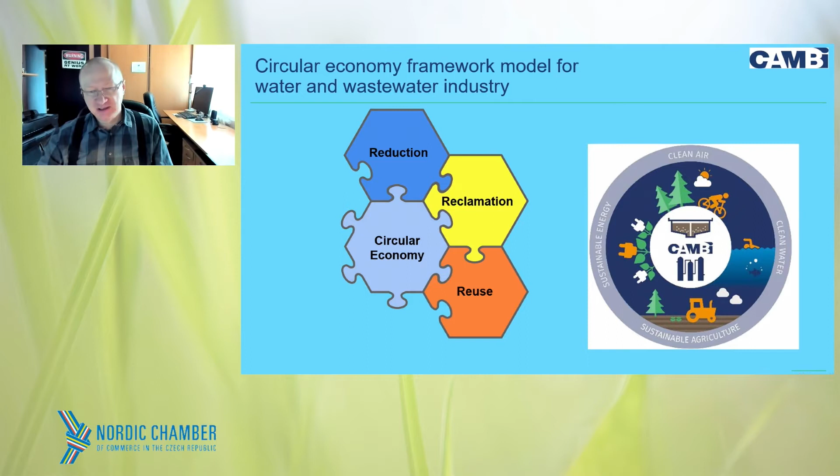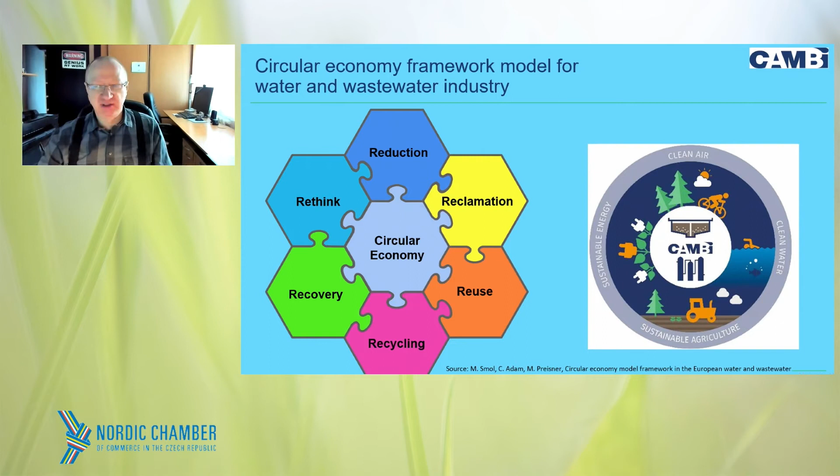The next is the reclamation, which is the application of effective technologies for the removal of pollutants from water and wastewater. The following is the reuse. We can reuse the wastewater as an alternative source of water supply for the non-potable usage, and it was also mentioned before. We have also the next R, which is recycling, the recovery of water from wastewater for potable use. It's also mentioned before. Recovery of resources, such as nutrients and energy from water-based waste. And finally, the last but not least, it's also very important, rethinking how to use the resources to create a sustainable economy, which is free of waste and emissions. This is the source, if someone would be interested in the details of this framework model.

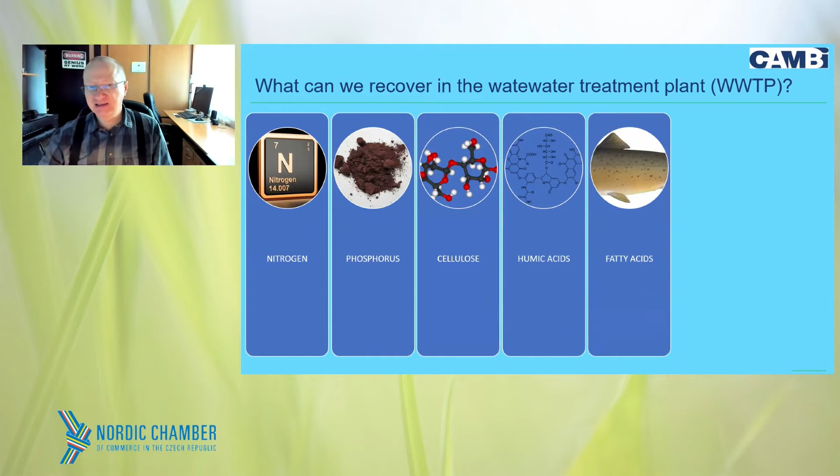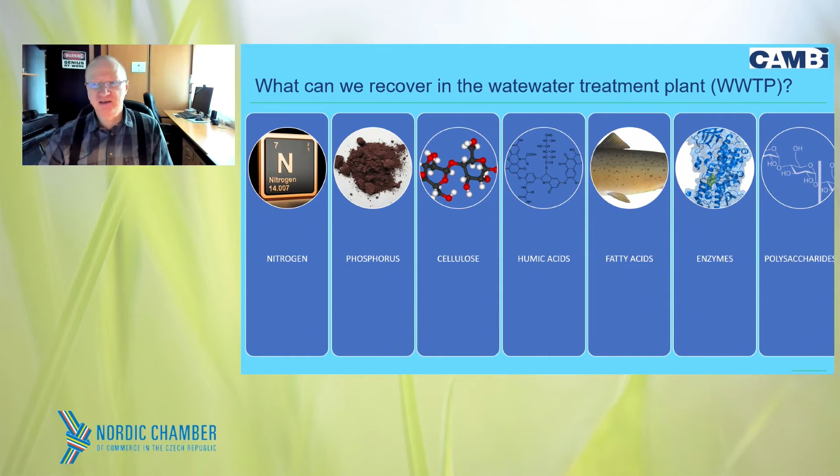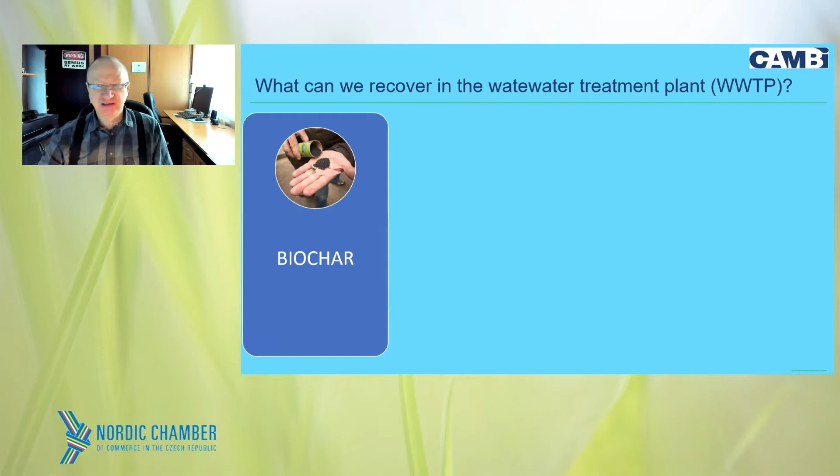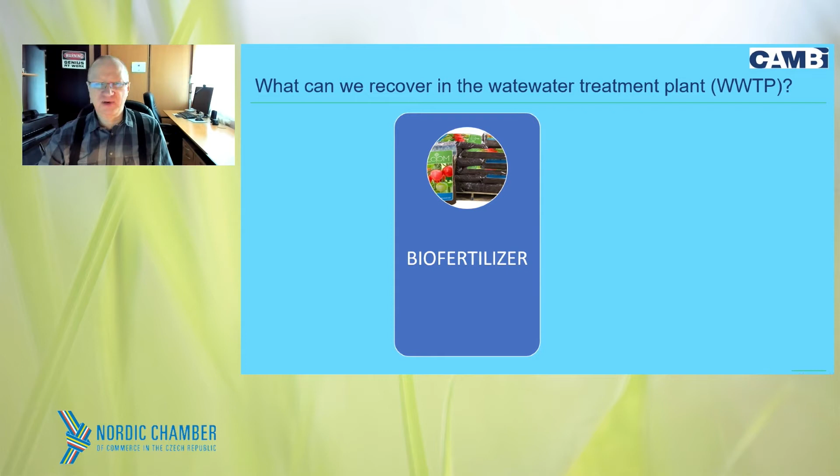There are several things we may recover from our wastewater. Let's just mention a few of them. The most common are nitrogen and phosphorus, but also others, like cellulose, humic acids, fatty acids, enzymes, or polysaccharides. Some technologies already exist and are quite commonly used, and some still require improvement because they are in the prototype state. The biochar recovery technology exists also, but it is at the present time used in rather small plants. What I would like to focus on are the biofertilizer, electricity, and heat.

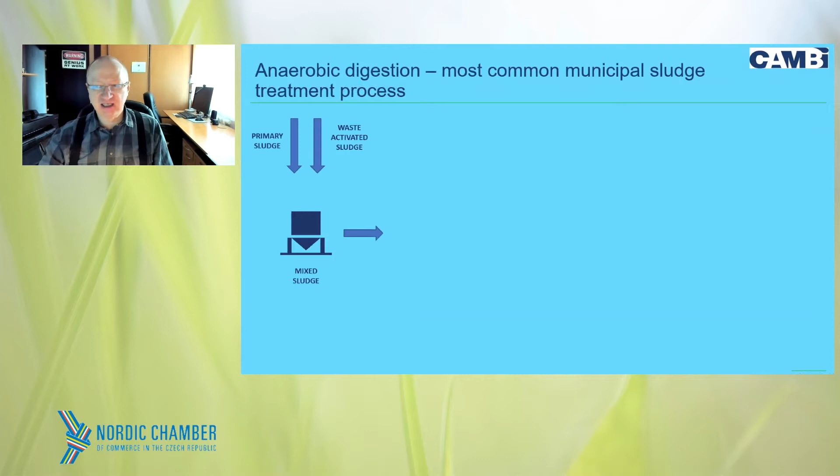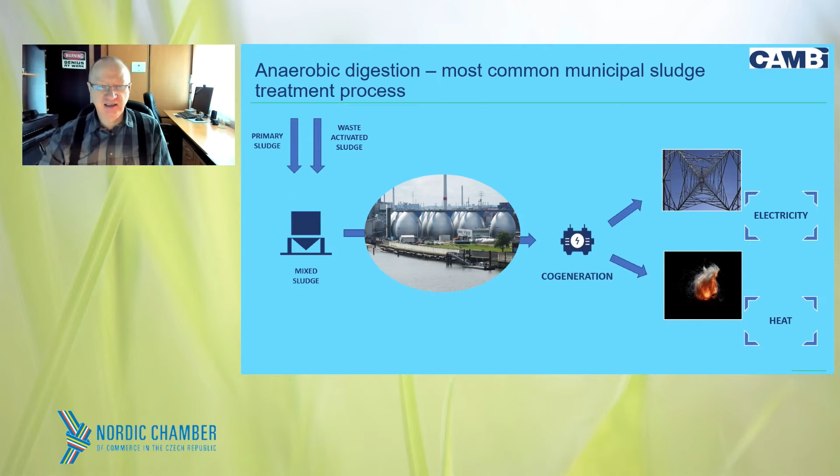The anaerobic digestion of municipal sludge is widely known and commonly used, so I will not go into details. Both primary and waste-activated sludge are mixed and sent to the digestion chamber. Then biogas is produced, which is burned in cogeneration and produces the electricity and heat. As we see, the conventional anaerobic digestion process gives us three precious products: electricity, heat, and final sludge. This is the place where the final sludge is produced.

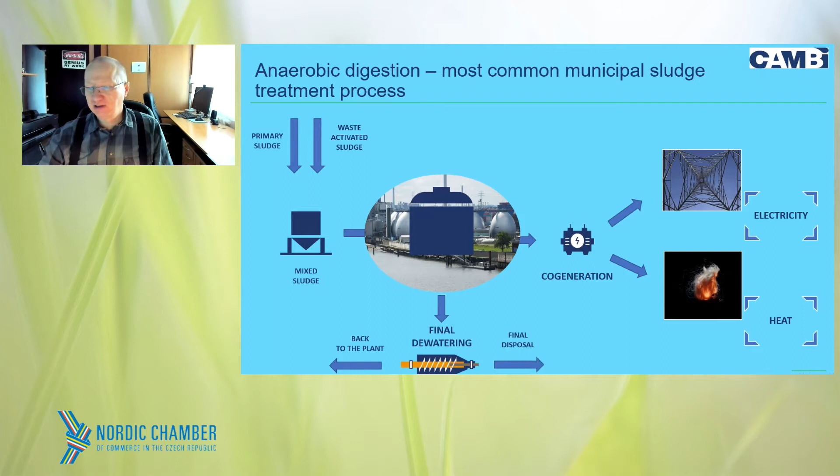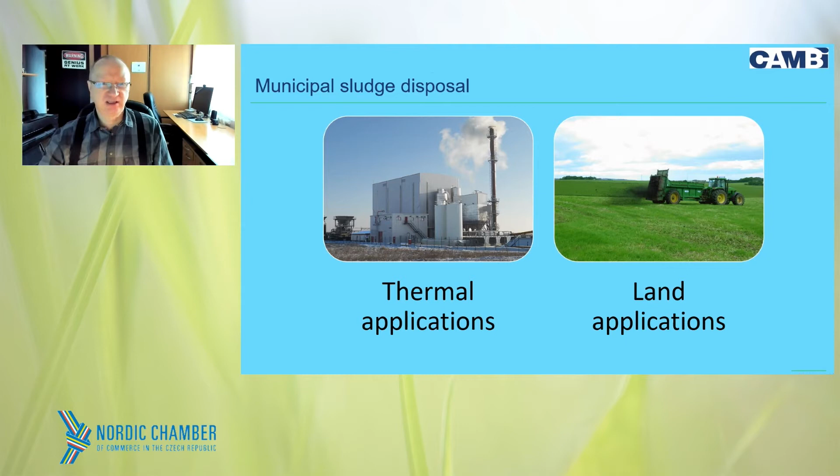In general, there are two groups of final sludge disposal. The first one is the thermal applications, and the second is the land application. Today, I will not discuss the thermal applications because they only partially match the concept of the circular economy. I will rather focus on land applications. The sludge directive regulates conditions of using the sludge in agriculture. Among the other things, it describes conditions of the application, reporting obligations, and, important from the processing point of view, the limits related to heavy metals.

However, of course, we shall remember that heavy metal content in the biosolids is the consequence of their content in the raw sludge and the quality of the wastewater treatment. The anaerobic digestion does not change metal content, but it increases its concentration due to the reduction of the sludge amount. Then we have the fertilizing regulation. Among the other things, it also covers the use of the biosolids. I mentioned just the most important regulations, but there are, of course, several which we have to comply with. And what can we do to comply with all those regulations?

We may try to enhance the anaerobic digestion process, which has basically 4 steps which occur one by one. The process is probably perfectly known to you, so maybe it is not necessary to repeat it. However, there is some purpose which I would like to mention. The steps of the anaerobic digestion are hydrolysis, acidogenesis, and finally methanogenesis. And like all chemical processes which consist of individual sub-processes, the kinetics of the slowest sub-process determines the kinetics of the whole reaction. And in this case, the slowest sub-process is the hydrolysis. So the conclusion is that if we can increase the rate of hydrolysis, then we can increase the whole process of the methane fermentation. And for this purpose, we developed the process which is called thermal hydrolysis.

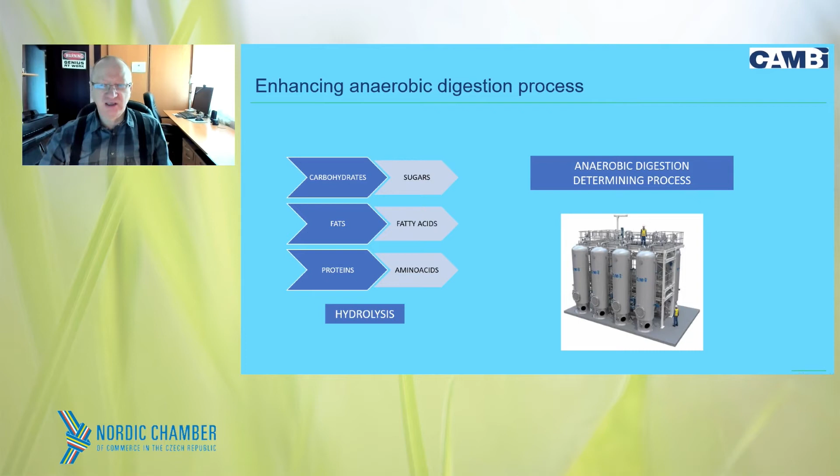The combination of thermal hydrolysis and conventional anaerobic digestion gave the process which we called advanced anaerobic digestion. This name was created by the United Kingdom utility company, which holds several water and wastewater treatment plants. The company name is Thames Water.

In this case, the sludge is pre-dewatered, and then it goes to the thermal hydrolysis process. The centrate from the pre-dewatering is sent back to the plant, and the hydrolyzed sludge after dilution is sent to the digestion. As previously, the biogas produced in the digestion process is burned in the cogeneration unit, but it also could be upgraded to biomethane and loaded to the gas network.

The rest of the process is the same. Electricity and heat are produced. The heat is used to produce steam necessary for the thermohydrolysis process. The sludge after digestion is dewatered. The centrate is again sent back to the plant, and as a product, we receive the biosolids.

Let me now show you how the thermohydrolysis process works. The sludge, it could be a mixed sludge, but it could be separate, for example only the surplus, is pumped to one of the four reactors after preheating with the recovered steam.

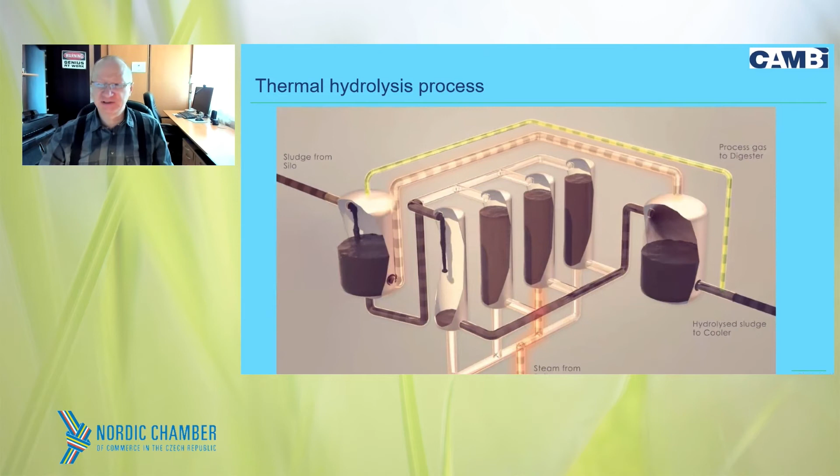Then the sludge is cooked with the steam at a temperature of about 165 degrees Celsius and under about 6 bars pressure. After that, there is a rapid discharge to the tank, which is called the flash tank, and then there is rapid depressurization from 6 bars to atmospheric pressure. So there occurs the process called the steam explosion, which additionally disrupts bigger particles.

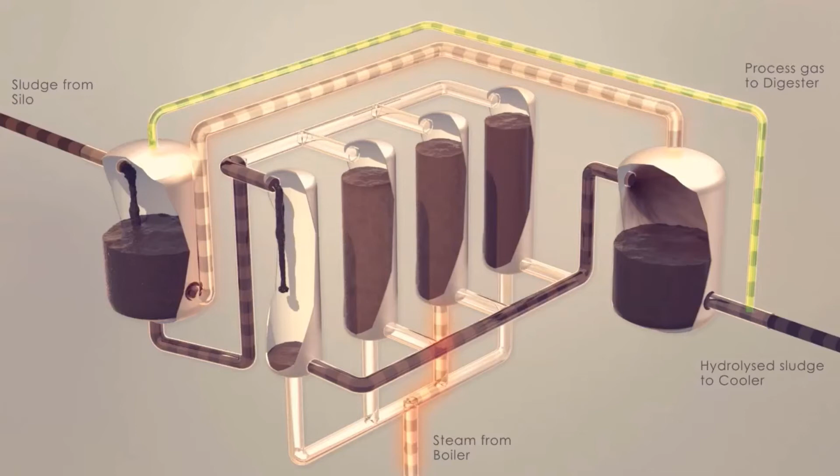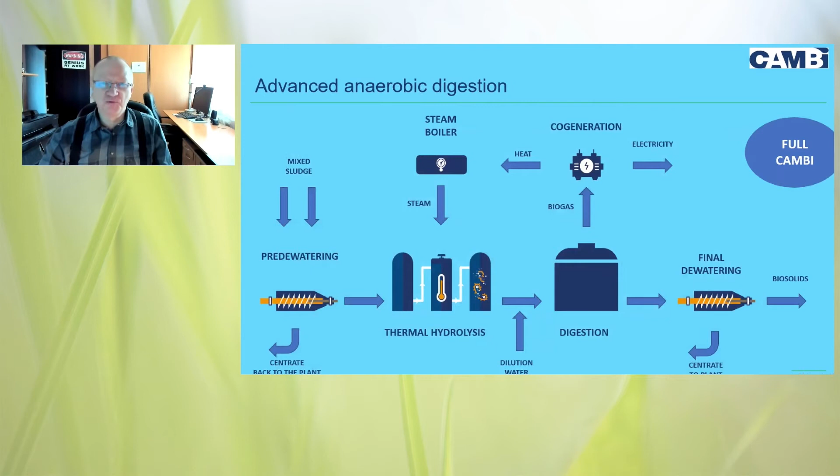So this is the advanced anaerobic digestion. This slide was already presented to you, and we call it the full CAMBI process because it hydrolyzes both the primary sludge and the surplus sludge.

But it is not the only solution. There are also other setups of the process where we only hydrolyze the waste activated sludge, and after pre-dewatering to about 16 to 18% dry solids, the sludge is hydrolyzed and sent to digestion. Then the primary sludge is added, because primary sludge ferments quite well without thermohydrolysis due to its chemical composition. Then, like previously, we produce the biogas and all the other things.

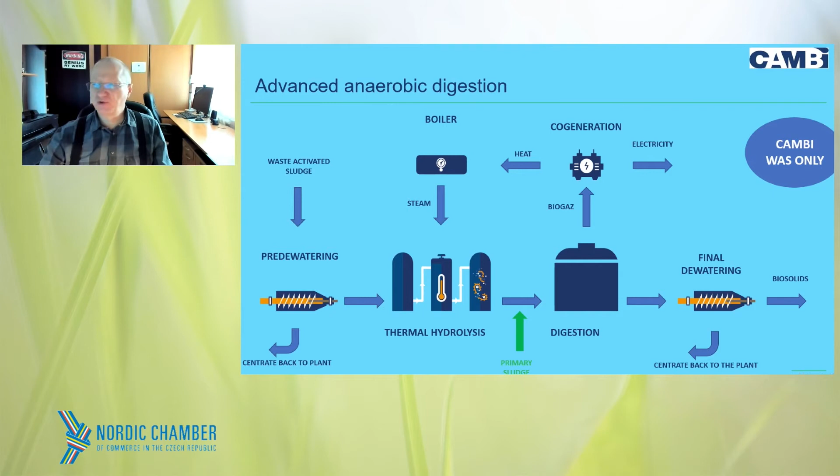There is no difference to the standard conventional anaerobic digestion, and again we receive as a product the biosolids. The difference between these two processes is that the full CAMBI process sterilizes the whole sludge before digestion, while the WAS-only process sterilizes only the surplus sludge. Depending on the final disposal of the process, we may use one or the other.

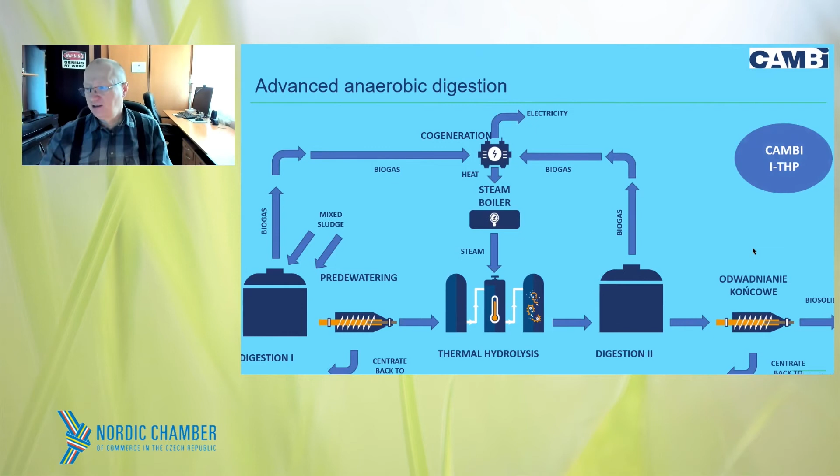There is also a recently developed process called intermediate thermohydrolysis, where if we have available digester volume, we can have the first digestion step followed by the hydrolysis and followed by the second step of digestion.

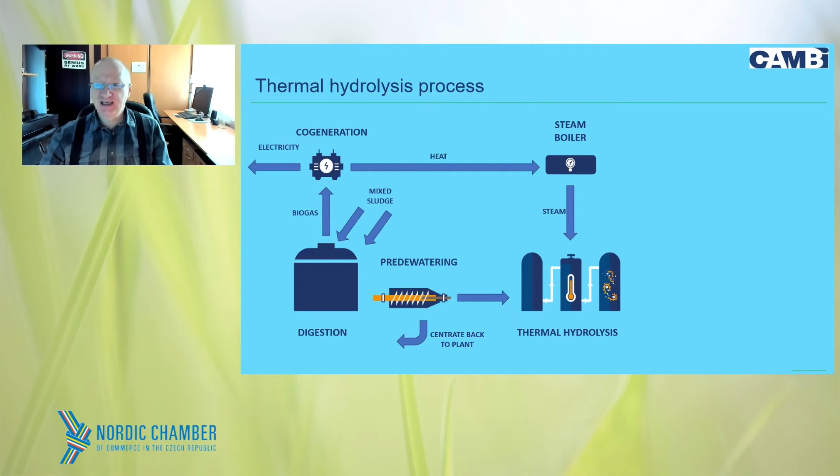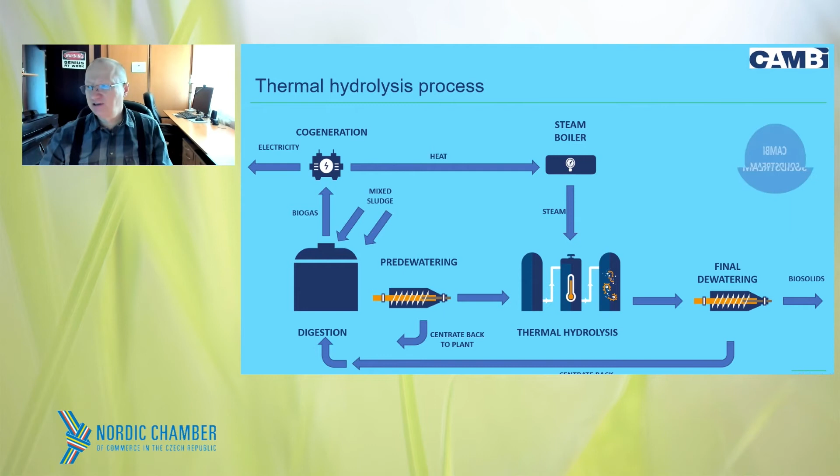And finally, currently at least, the process which is called CAMBI SolidStream. In this case, the hydrolysis takes place after the digestion, and the centrate from the final dewatering, which contains a lot of COD that later on can be transferred into methane, is sent to the first digestion step.

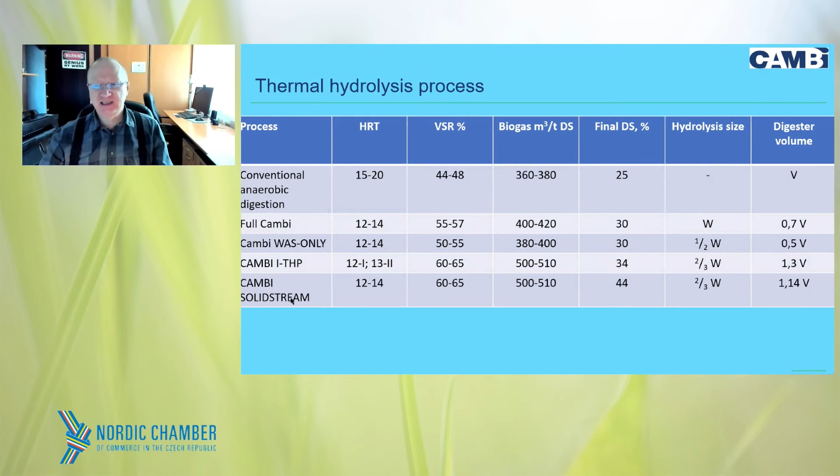This is the comparison of the different processes. The first obvious conclusion is that thermohydrolysis reduces the necessary digester volume, and the last two can be used only if there is existing available excessive volume of the digesters.

So how do the biosolids produced in advanced anaerobic digestion fit the circular economy concept? As I already mentioned, the current fertilizing regulation in the European Union allows the use of biosolids as a natural fertilizer. But of course member states can implement different regulations. The example here is Germany, where using biosolids as fertilizer is forbidden, and only incineration or co-incineration is currently allowed. But for example, in countries outside the European Union, like Norway, United Kingdom, USA, Canada, or Australia, biosolids are commonly used as biofertilizer.

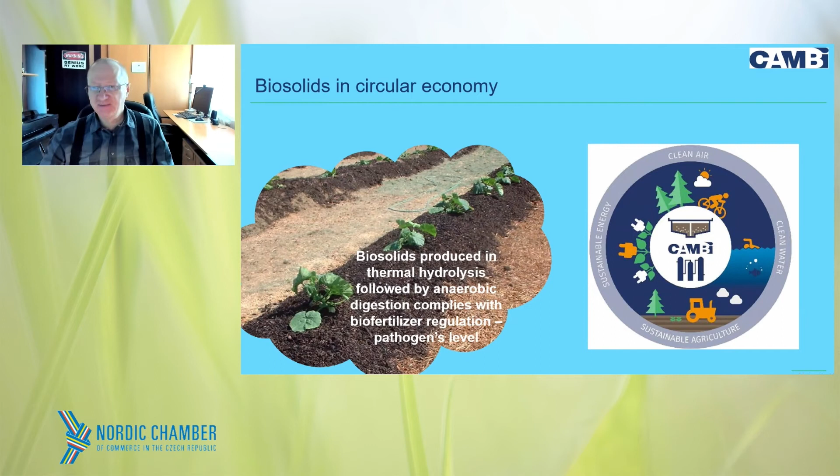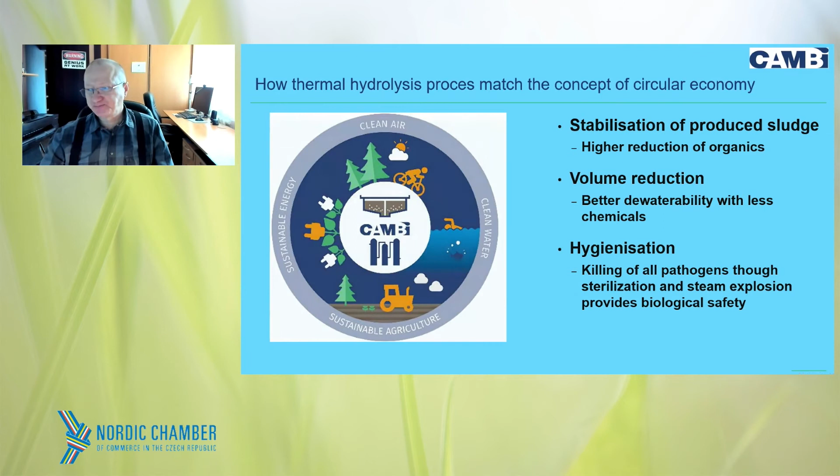So let's answer the question: how does thermohydrolysis fit the concept of circular economy? First, it stabilizes the sludge already, so no additional step is necessary. It reduces the volume of the final sludge for disposal, because the hydrolyzed sludge is much easier to dewater compared to the conventional process. It hygienizes the sludge because there are no pathogens which can survive such high temperature and pressure. And finally, we can recover energy from the sludge, and reclaim the biosolids and use them as biofertilizer.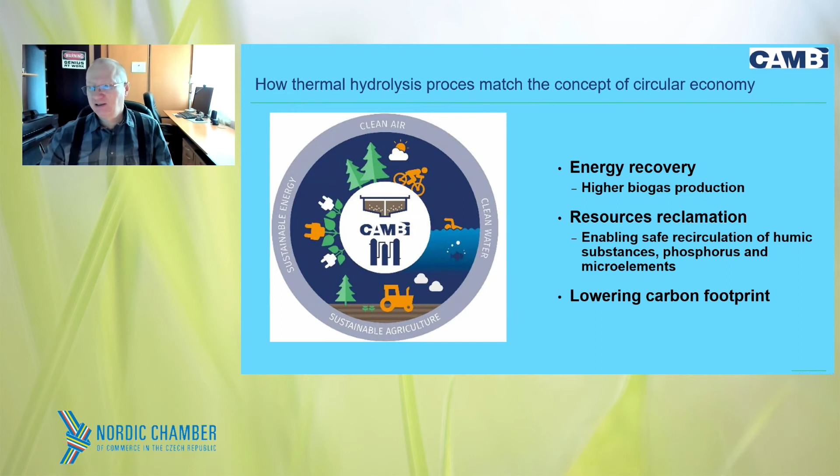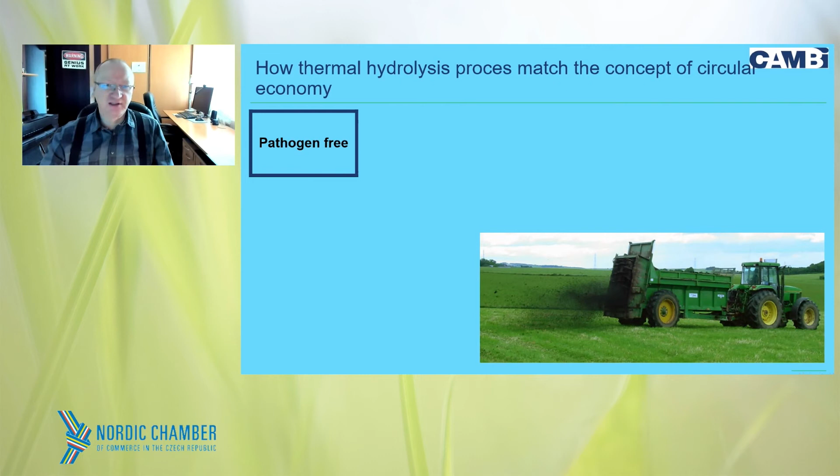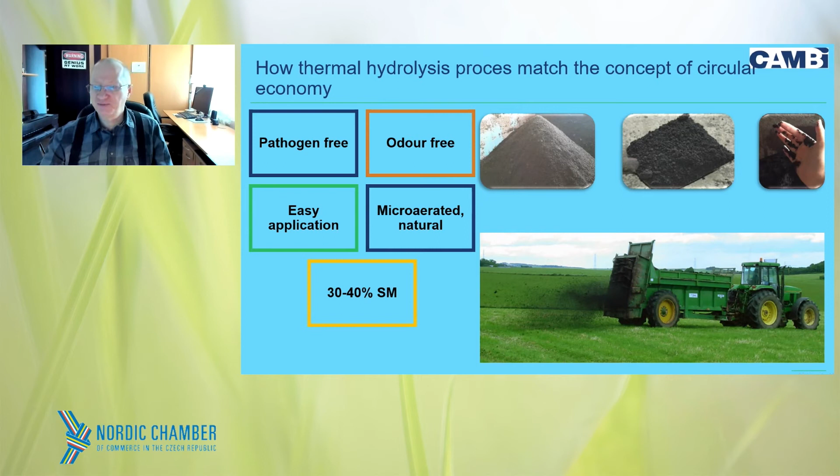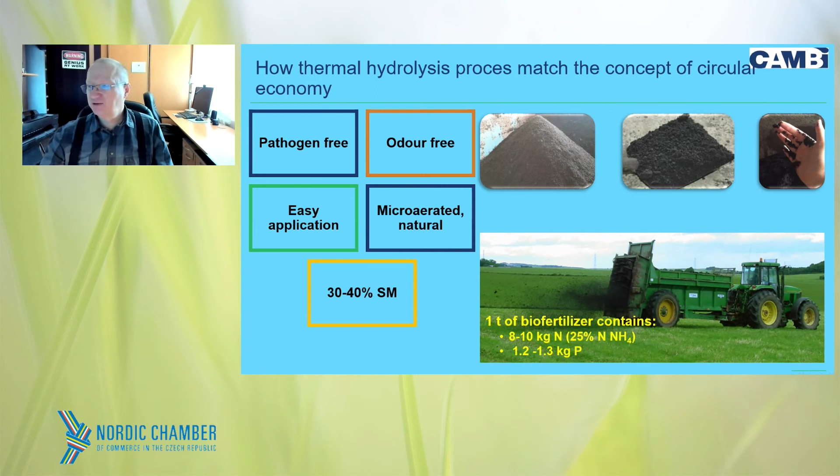So last but not least is a tremendous lowering of the carbon footprint. The biosolids produced in the advanced anaerobic digestion produce the fertilizer, which is pathogen-free, odor-free, easy to apply, and natural, because of the dry solid content in comparison with the sludge produced in the conventional anaerobic process. It contains several nutrients which could be successfully returned back to the environment.

Jacek, thank you very much for your presentation. I just checked the chat, no questions to your presentation. But I might mention one question: could you describe a little bit more the market potential of the products you have presented related to the activities of your company?

But you mean the market for the anaerobic digestion process, or the market for the biosolids as the final product? Biosolids, as the biosolids. Yeah.

I must say that depends on the country, because even if the European regulation allows use of biosolids as a biofertilizer, there are different internal regulations in each member state. For example, in Poland, about 50% of the sludge is used in agriculture, partially for crops for food, and partially for soil improvement in forestry, lawns, and this kind of places. In Norway, over 90% of sludge is used in agriculture and soil improvement processes. In Germany, no sludge is used for this purpose - in the European Union, Germany is an exception because it is necessary to burn the sludge either in incineration plants or cement or power plants.